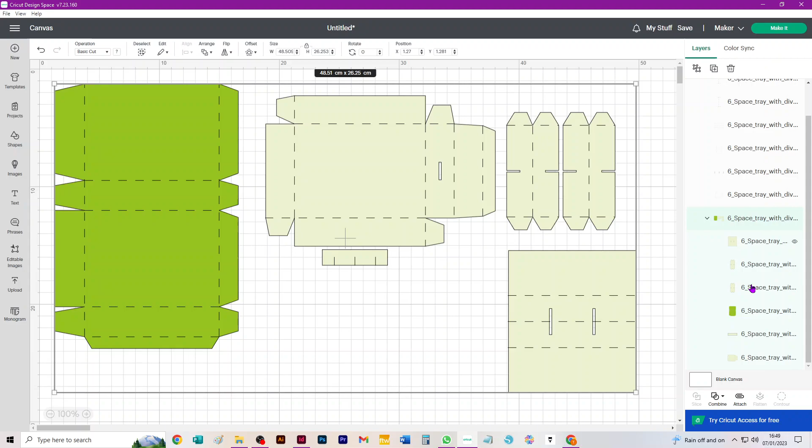Second step is to select the group with all the coloured cut pieces in it. So you just look down, find this next downward pointing arrow, click the text at the side of it, which is the name of the group, and you can see that everything gets selected. While they're all selected, go back to the top of the layers panel and click ungroup.

Your third and final step, as with any multi-part SVG with score lines, is you need to select everything else on screen, which is still in another group. SVGs, if they've been made correctly, come in 3 groups. So select that last group and ungroup it a third time. So 3 ungroups, ideally in that order. If you don't do it in that order, things will jump around in the layers panel, and it's fixable, but it's just work you don't need to do. If you do it in that order, everything will be perfect.

So the next step is to attach the scores to each individual piece that they relate to, and I think the quickest way is to just click on screen somewhere, drag a box to enclose just the individual piece and its scores, and go back to your layers panel and down at the bottom click attach. It's really important that you do that piece by piece, because if you select the whole SVG and attach it, you'll get the message from Design Space that the project is incompatible with your machine. If you ever get that, it's usually that you've attached something or the actual thing you're trying to cut is too big.

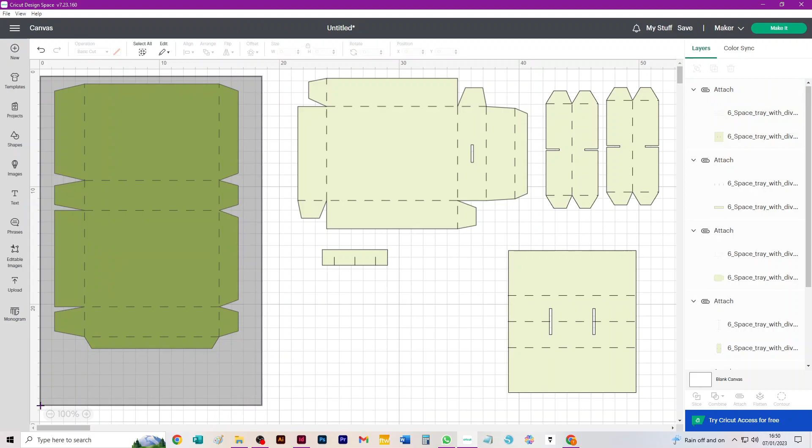So this is the actual drawer. That's the little handle that goes in the front of the drawer, and that's the base of the insert. This is the sleeve that wraps around it. Okay, so that's dead easy. We'll click make it.

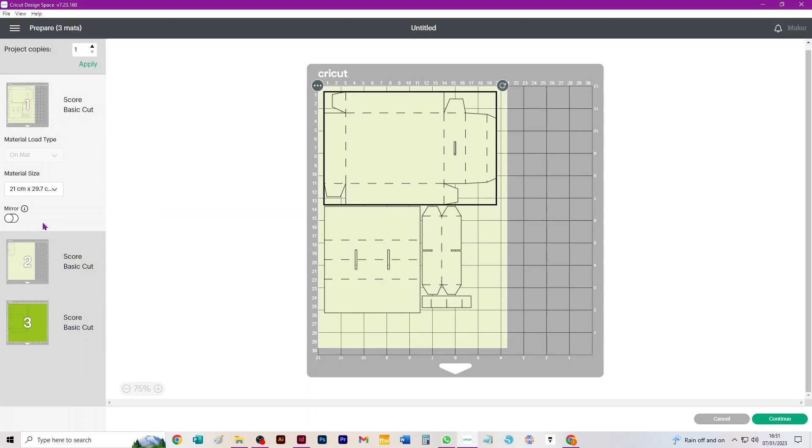So if you're going to make your sleeve out of something contrasting, I think it would probably go onto 2 12x12s anyway. So cut on 12x12, you can see that you need 1 piece 12x12 for the sleeve and 1 piece for the drawer and its inserts. Let's just try on A4 and see what happens. Yeah, it's telling us we can't get that little thing on there, but I think we can. So if we go to that mat and click move, we'll choose the first mat.

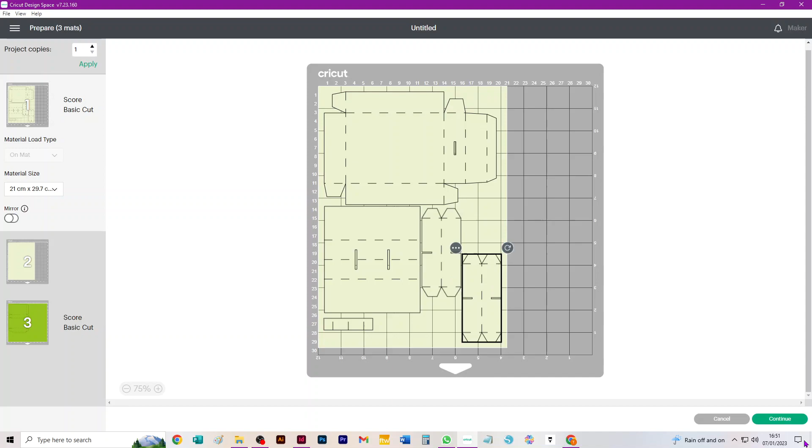Let's just have a play. We'll move that down there. I think they work now. They're just over there. Yep. So if we press continue. Yeah, you can get the whole drawer out of 1 A4, and you can actually get that sleeve out of 1 A4 as well. Yeah, definitely. So 2 A4s for that little single drawer box.

Okay, I'm not going to cut it, so I'll just click cancel and we'll get rid of that, and I'll bring in the 2 drawer box, which is that one there. Zoom out a little bit.

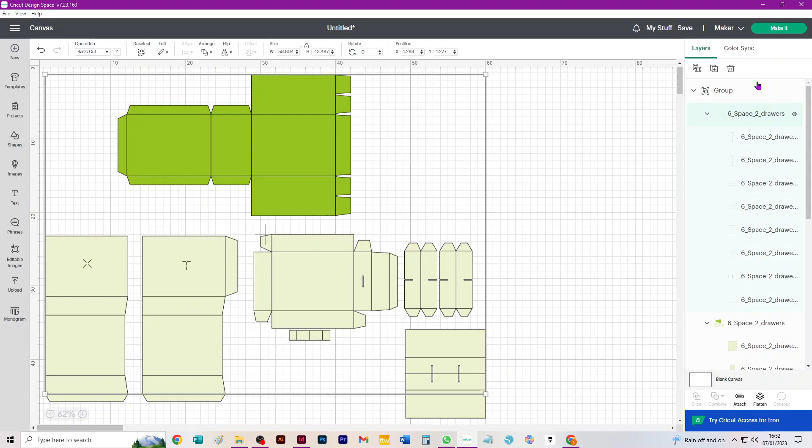So we need to go through the same procedure again. You need to select that first group in your layers panel. You click on the second line down, which is the name of that group. Go over to your operations menu, click on basic cut and go down to score, and while it's selected, ungroup.

Second step, select the next group down, which is all the coloured cut pieces and all these tiny cuts and slots within them, and ungroup that. Final step, select absolutely everything on screen. You could do that with this select all button, or by dragging a box around it, any way you like. Ungroup a third time, and then we need to attach those scores. So for each individual piece, click on screen somewhere near it, drag a box to enclose it, and click attach.

And I'm going to talk about these drawer pieces in just a sec. So as you can see, attaching them isn't laborious, but it does take a little bit of time, and it's for that reason that even though you need 2 drawers, I only give you the pieces once, because it's quicker to do all that attaching and converting and then just select it all and duplicate it.

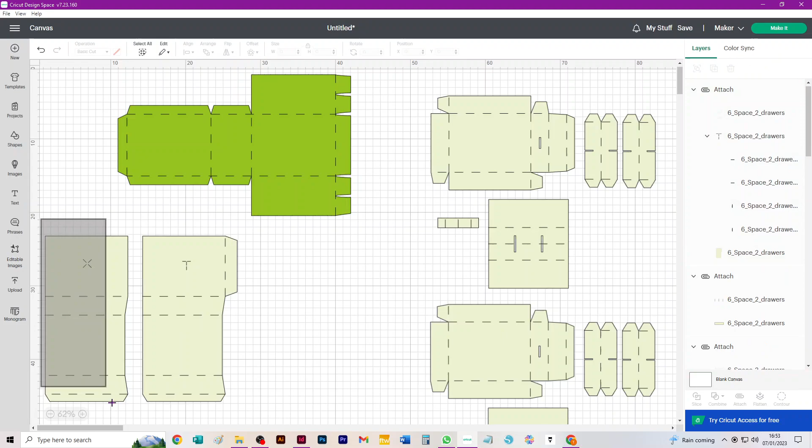So you actually have 2 drawers and inserts. This is made a slightly different way now than the single drawer box. You have drawer holders and then the whole thing is wrapped in a sleeve. The reason they've got these funny symbols on will become clear when you look at the PDF of instructions that you get with it. The one marked with a T is the top drawer holder, and the one marked with an X is the bottom one. Don't worry that you don't understand that now, you will when you read your PDF.

So I think that's everything selected now. I am making a box which includes the dividers inside it. If you're making the tray and you're just going to put the plastic chocolate box in it, then you wouldn't cut these bits, you wouldn't cut anything to do with the divider. That's a handle, so you definitely cut that. But these 2 bits are the divider, so if you were going to cut those, you'd just get rid of them for now.

I think when you've set the whole thing up like this, it's a good idea to save it as a project. Then if you come back to it and decide you're not going to make the inserts, you can just delete them for now and then not save when you quit. That way the project will always be there in exactly the same format. Right, so I'm going to click Make It now.

And looking at that, yeah, they won't fit anywhere else, I don't think. So you're going to need 3 12 by 12s. What would happen if we used A4? Because we can, 1, 2, 3, or 4 A4s. That might be a little bit more economical actually.

And then when it comes to the sleeve, you just need 1 A3 and the long mat. 1 sheet of A3 on the long mat, it's too big for 12 by 12. Okay, so again, I'm not going to cut it. Get rid of that, and I'll bring in the box with the 3 drawers this time. I can tell by looking at it in my library that that's the 2 drawer because it's got the 2 drawer holders and this has got the 3.

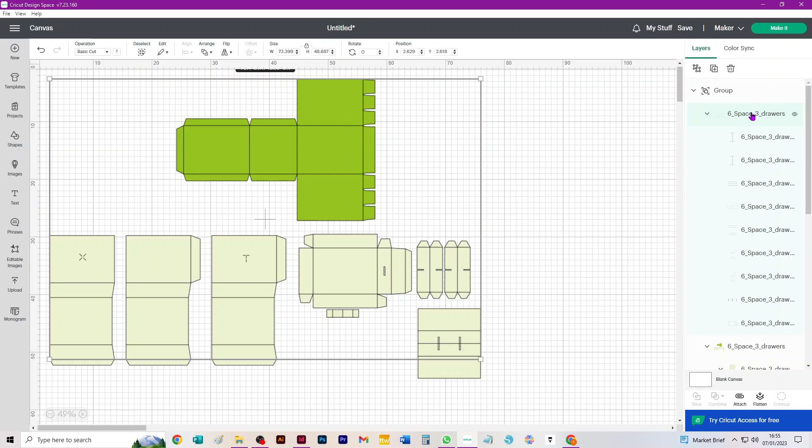So again, we need to go through that process. Select the first group, the second line down in your layers panel, click on basic cut, go down to score in your operations menu, and while they're selected, click ungroup. Second step, select all the coloured cut pieces and ungroup those. Last step, select the whole thing, any way you want to do it, and ungroup those. And then we need to attach the score lines once more. Move that out of the way.

Again, these are the insert pieces. The base insert covers the whole of the bottom of the drawer, and then these are the sort of rods that go across it. This is the actual drawer. That's the handle that goes through the drawer. And these are the drawer holders. I'll just have a chat about these.

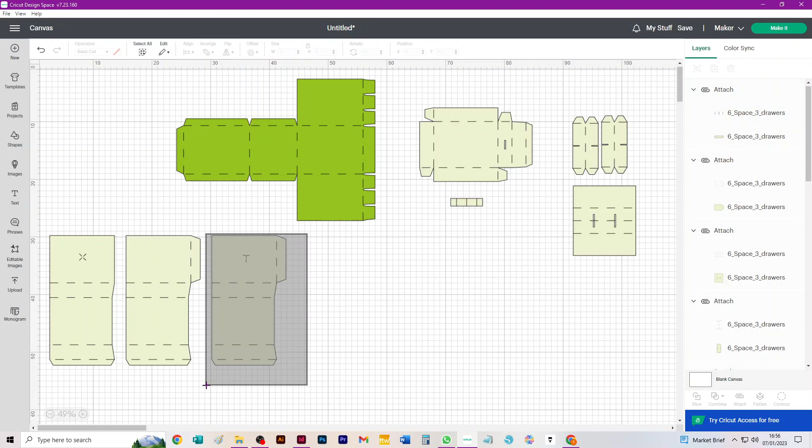So this is the 3 drawer box, and again you will understand exactly which piece to use when you look at your PDF of instructions. But just like the other one, T means top, X means base, therefore the only thing that's left is this one, so it must be the middle one. But again, you get all that explained in the detailed instructions that come as part of your download.

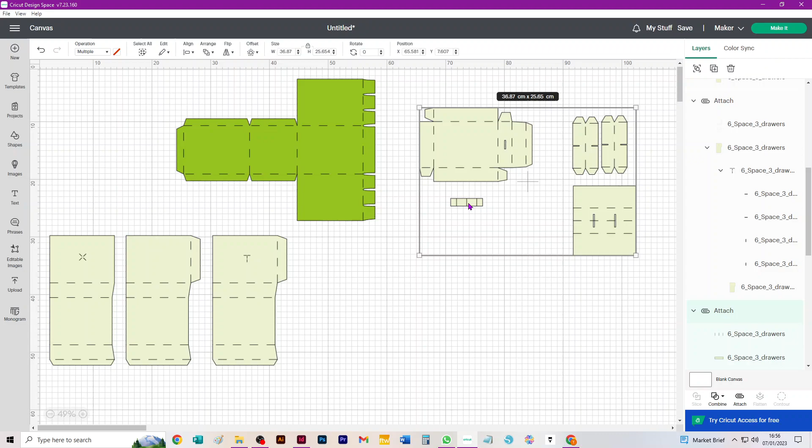Again, because this is a 3 drawer, we need 3 sets. Yeah, so you duplicate that once and again. Okay, so click Make It.

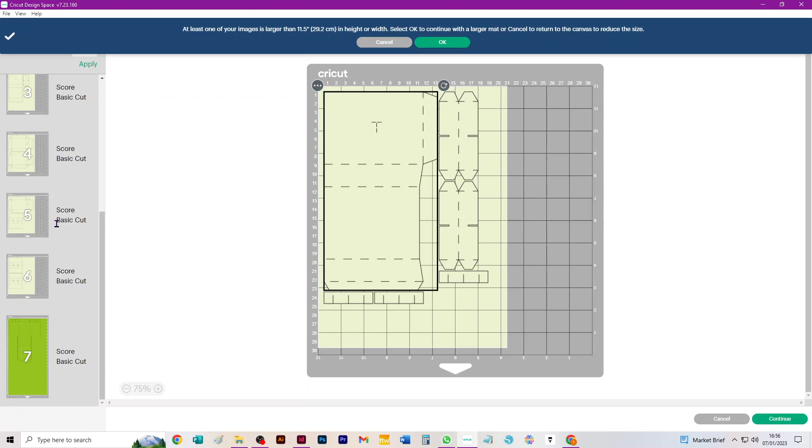Now all the rest of it will cut from A4. You need 6 sheets of A4 if you're using A4 to cut 3 drawers and 3 drawer holders, and then again for the actual sleeve that goes around everything, you've got to have the long mat and you need a piece of A3 or 12 by 24, whichever you can get hold of.

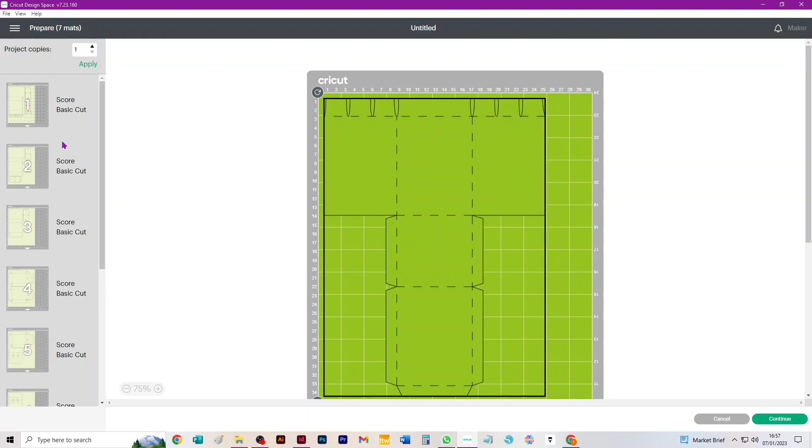Let's just change that to 12 by 12 and then we can, if it'll let me, it won't - we've gone too far. So I'll choose 12 by 12 for those. We need 1, 2, 3, 4 12 by 12s, and again the 1 A3 for the sleeve.